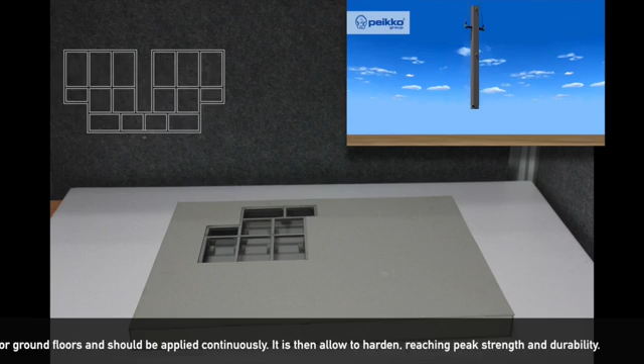Precast elements should be stored using the FIFO system, first in, first out, in accordance to the delivery schedule. Footings are installed on undisturbed even soil. Cast-in-place concrete is used for ground floors and should be applied continuously. It is then allowed to harden, reaching peak strength and durability.

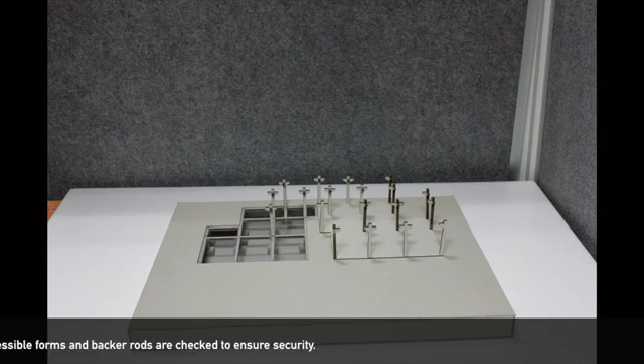Reference lines and offset lines are first checked to determine the required alignment and level of precast elements during installation. Shim plates, level pads, are set with non-shrink mortar to set the level of the respective elements. Compressible forms and backer rods are checked to ensure security.

Non-shrink mortar is filled in corrugated pipe sleeves and/or splice sleeve connections. It is applied to seal the gaps along the bottom edges of the inner sides of panels, ensuring good compaction at the joints to minimize risk of crack.

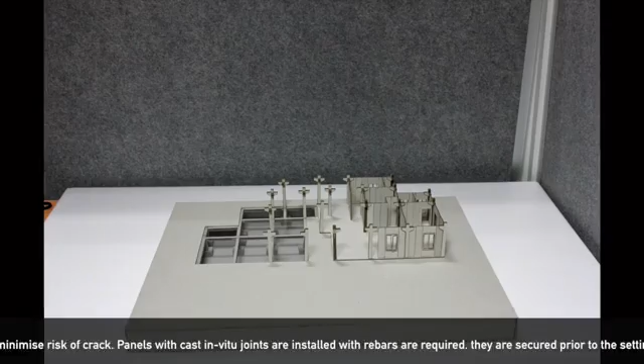Panels with cast in situ joints are installed with rebars as required. They are secured prior to the setting up of the casting for the vertical joints, with appropriate spacing between joint gaps to allow for proper installation of sealant and/or grout, ensuring watertightness.

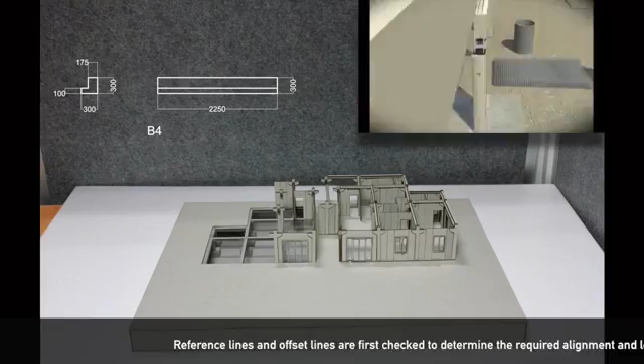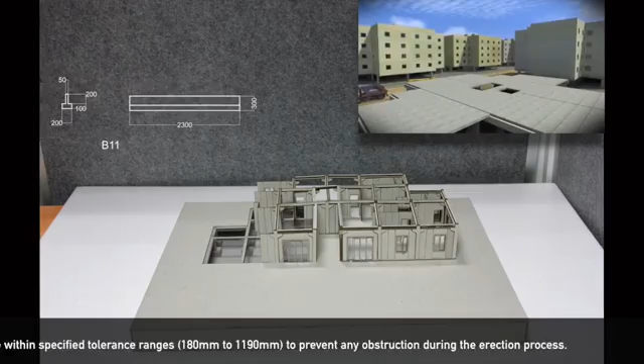Reference lines and offset lines are first checked to determine the required alignment and level of precast elements during installation. Protruding bars are examined to determine whether they are within specified tolerance ranges, 180 mm to 1190 mm, to prevent any obstruction during the erection process.

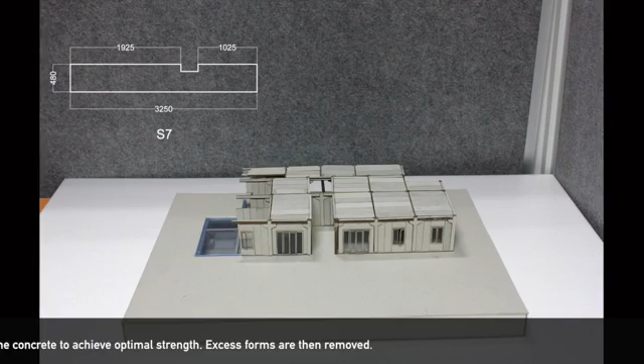Joint rebars are placed in accordance to the design specifications. Formwork is properly secured during the casting process of the in-situ joint. Once the concrete is cast, sufficient time is given for the concrete to achieve optimal strength. Excess forms are then removed. Continue previous steps to complete all 3 floors.

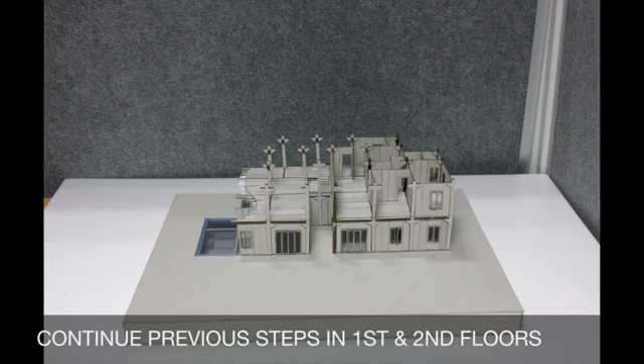Now, let's enjoy the music, shall we?

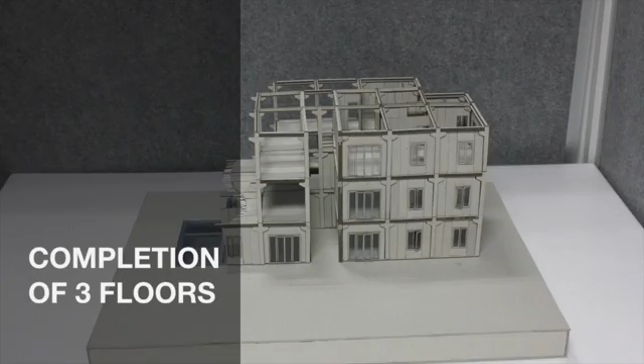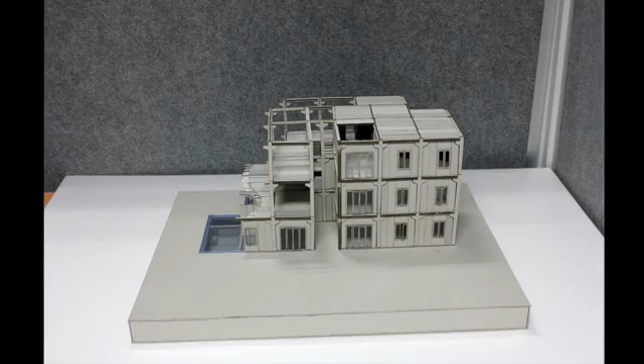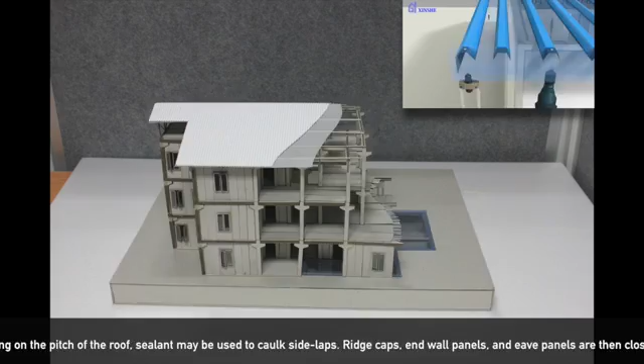Cranes and scissor lifts are then used to hoist the truss components into place. Screws are used to brace members, while clips are used to hold the truss members in place at connecting truss joints. Panels are then fastened to the truss using screw fasteners. Depending on the pitch of the roof, sealant may be used to caulk side laps. Ridge caps, end wall panels, and eave panels are then closed off using closure strips.

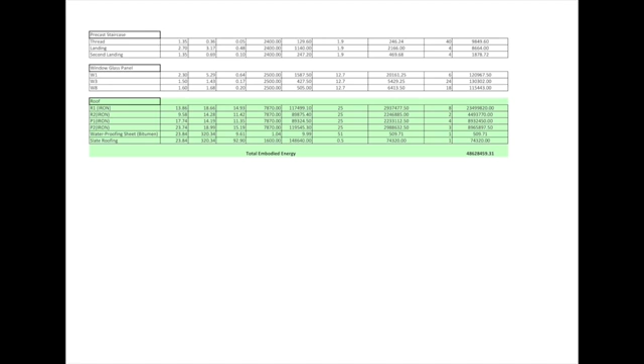The embodied energy of the galvanized steel roof is the highest among other precast components. An improvement is made by replacing the steel roof with an iron roof truss with slate roofing, successfully reducing almost half of the previous total embodied energy.